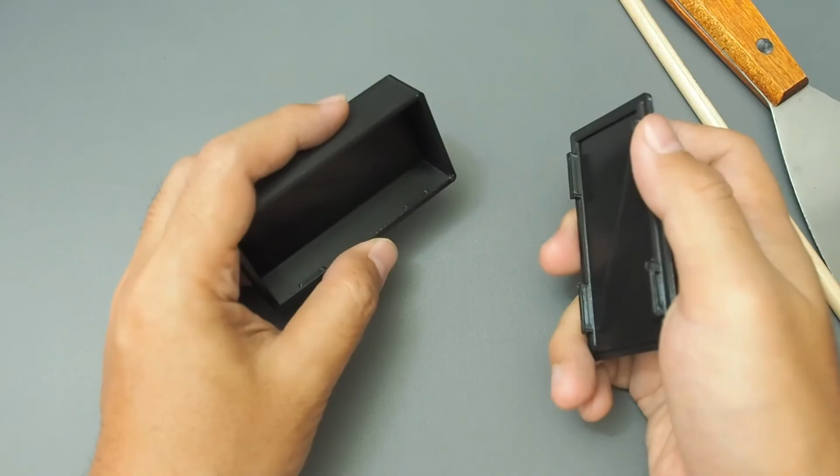Good day everyone, here we have a basic snap fit box or enclosure. It consists of two parts, the base and the cover. Let me zoom in. There are 4 teeth on the wall, and they will bite the grooves that are printed on the cover.

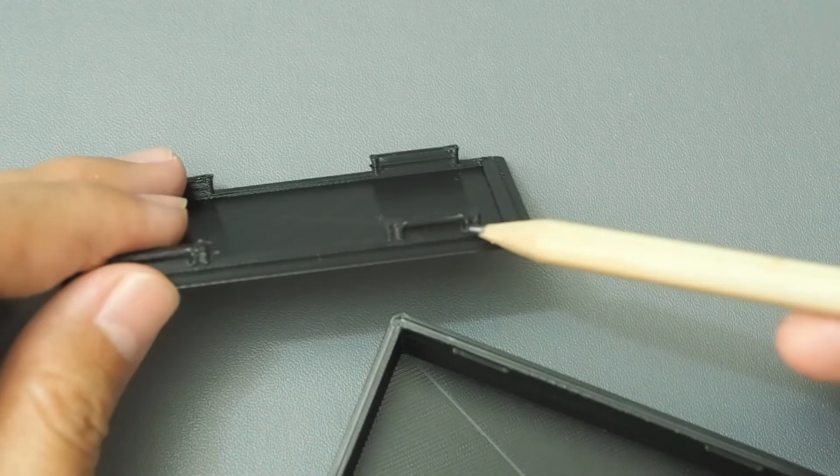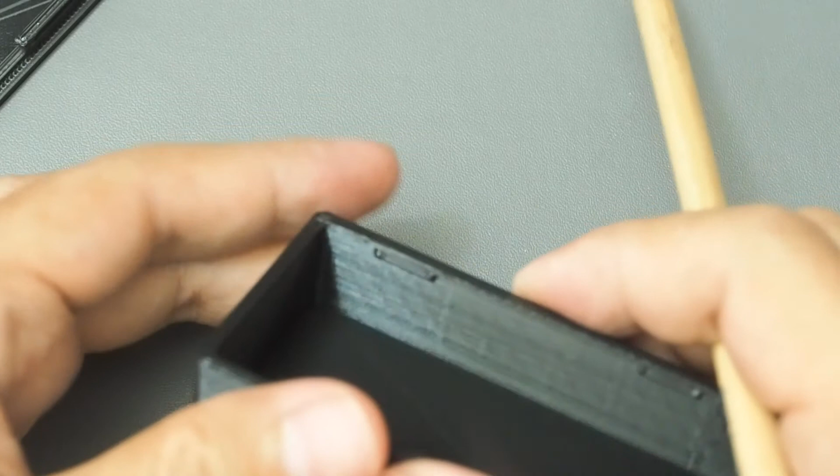There are a few things that I discovered while experimenting with snap fit designs. First, we must consider the flexibility when placing the teeth. For this model, we need to avoid placing them too close to the corners, and in this design, I placed them at a distance of 10 mm.

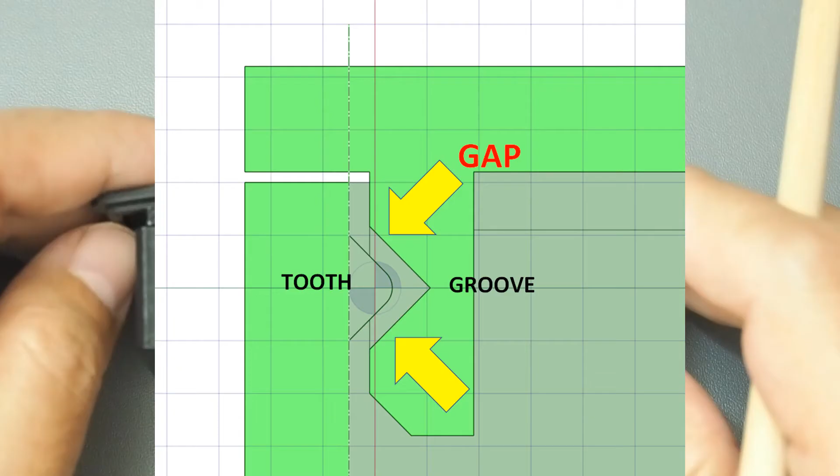Second, we also need to add some gaps or slack. The amount will depend on the accuracy of your printer, but for me, it works fine with a gap of 0.4 mm. For the record, I used a 0.4 mm nozzle with a 0.2 mm layer height.

Third, tighten the snap fit by directly or indirectly moving the tooth away from the contact surface, so it will pull the groove and the cover part. Now let's try to assemble this box. I put the parts together like this and then pushed. As you can see, it goes well.

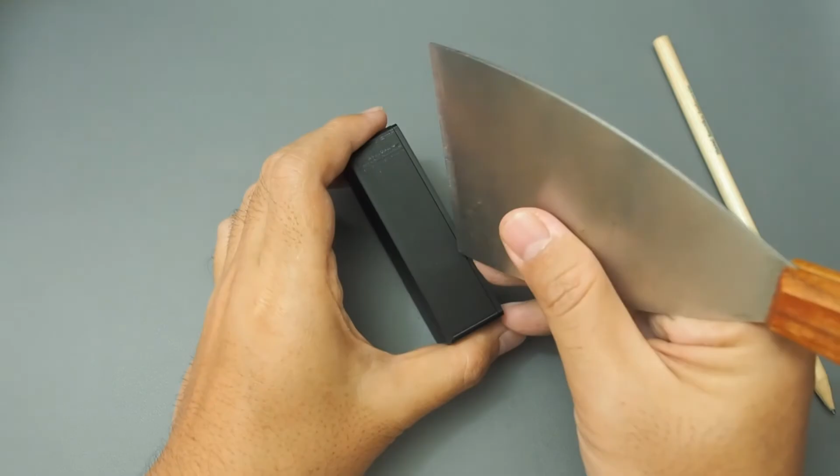And now to separate the parts, I use this scraper. Insert the tip into the small gap, then pry it open. Overall, it holds just fine, so I think this design can be applied to many snap fit enclosures.

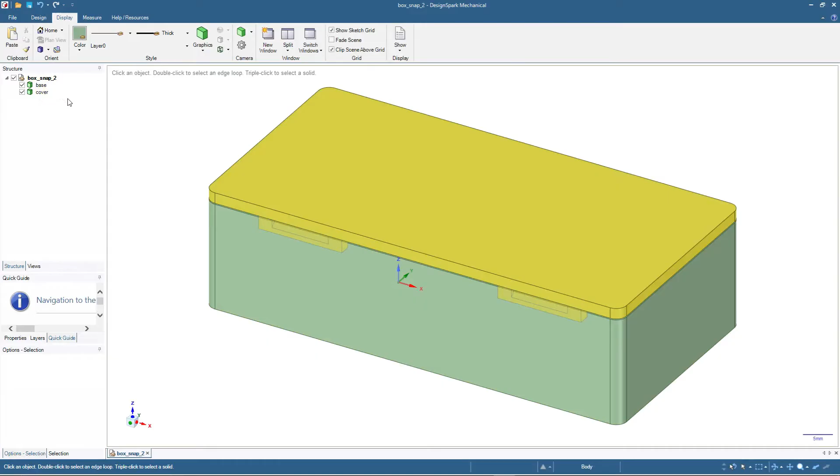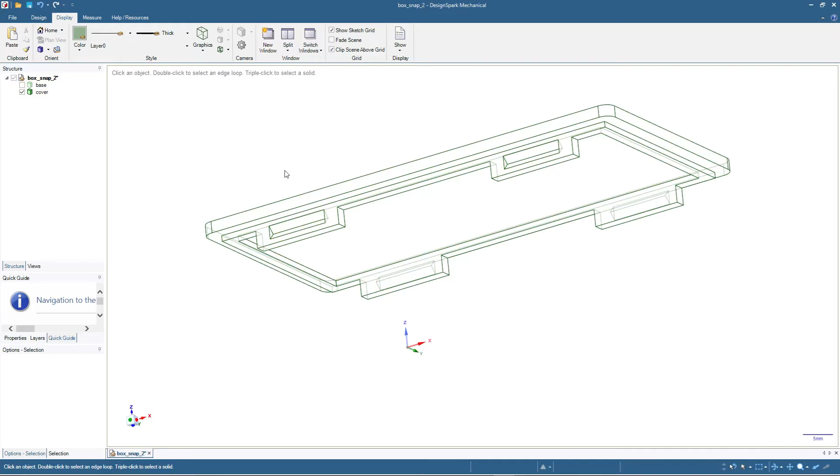This is how the design will look like. It consists of 2 parts, the base and the cover. And now let me change the view, this one, hidden line. So we can see that there are 4 teeth here, which is on the base part, like this, okay? And then there are also 4 grooves at the cover, which the teeth will bite into.

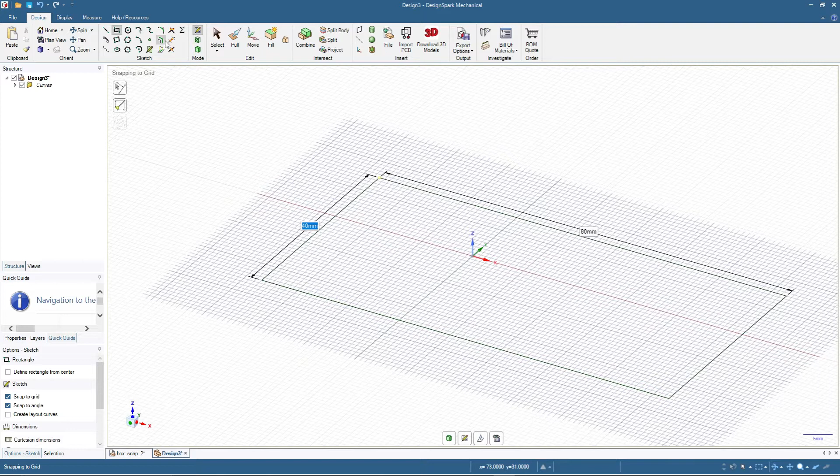So now we will design from scratch, and as usual, file, new, design. Okay, for this one, let's start with a rectangle with size 80 by 40 millimeters. So it's 80 by 40, yes. And then let me click this one, the offset curve, and we will add thickness. So I just double click this line, and then we will add 2 millimeters.

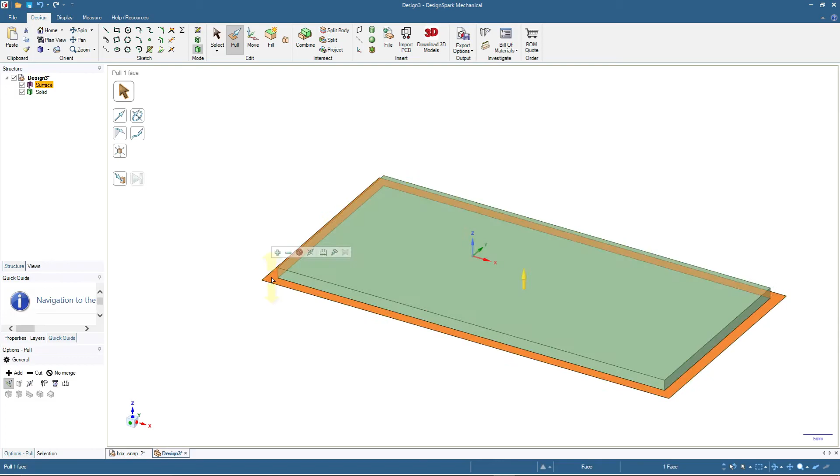Okay, and then I will click this one, pull, and I will pull this one as the base, 2 millimeters thick. Okay, and then for these walls, I will pull or extrude by, let's say, 20 millimeters. Okay, now we have this base shape. We will add the cover or the top part.

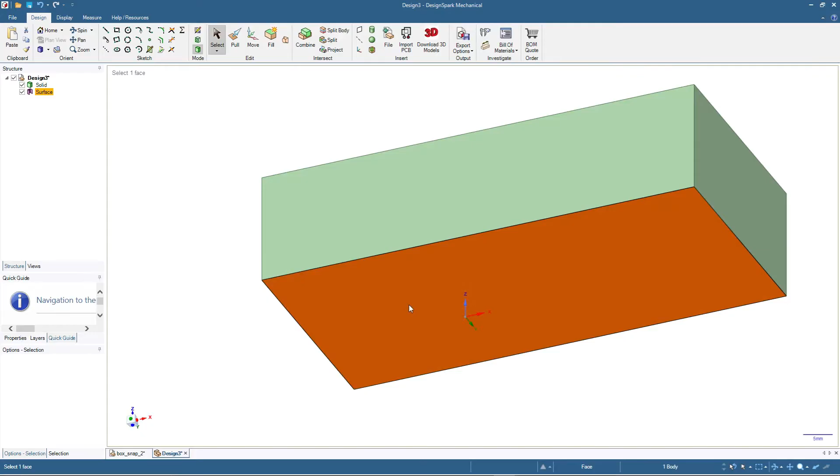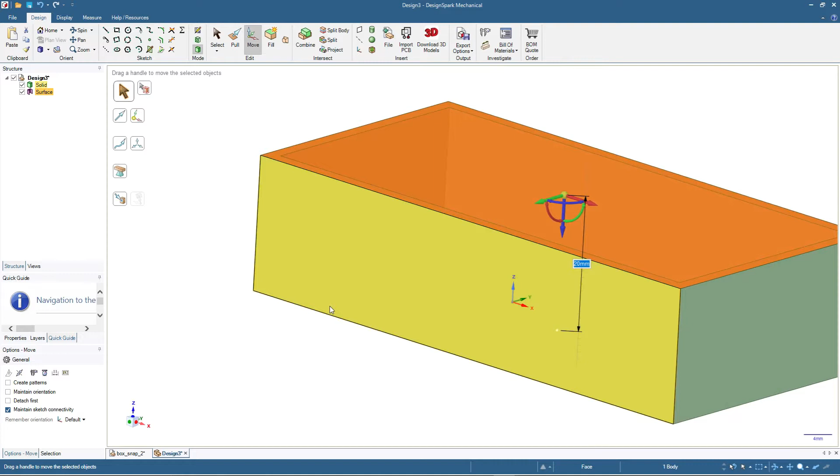I will copy this one, click here, and then press Ctrl C on the keyboard, and then press Ctrl V. So now we have a copy of the surface, and click this one, move, and we will move this one up by 20 millimeters. So we have that copy surface here, but we will add some more gap here to make allowance with the base part. So I will type in again 20.2, meaning we have 0.2 millimeters allowance, like this.

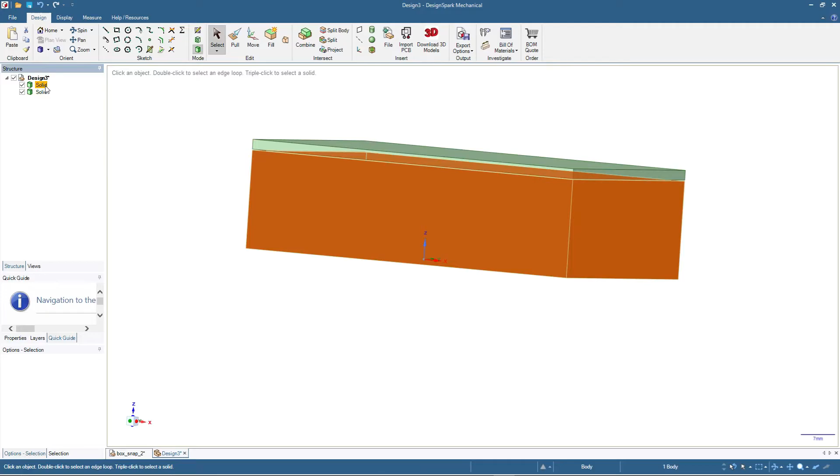Okay, now we will extrude the cover part from the surface, and then click this one, pull, and extrude by 2 millimeters. Okay, now we have this base and cover or cap. So let me rename the parts, base and cover. Okay, and then we will add some features for the snap fit mechanism.

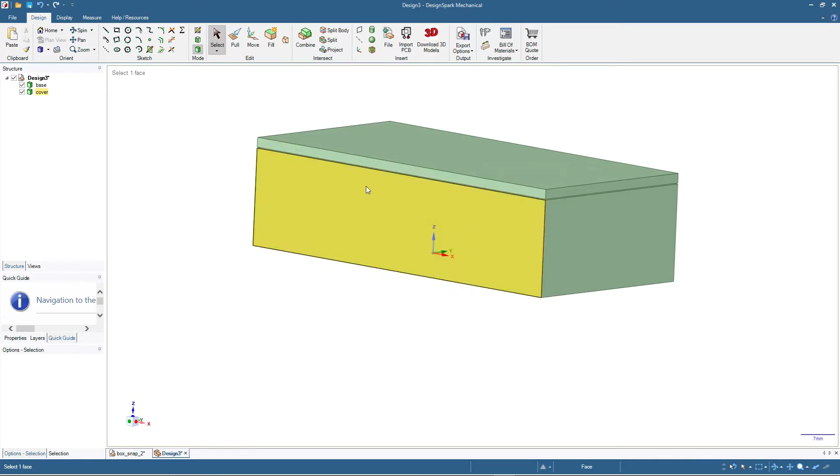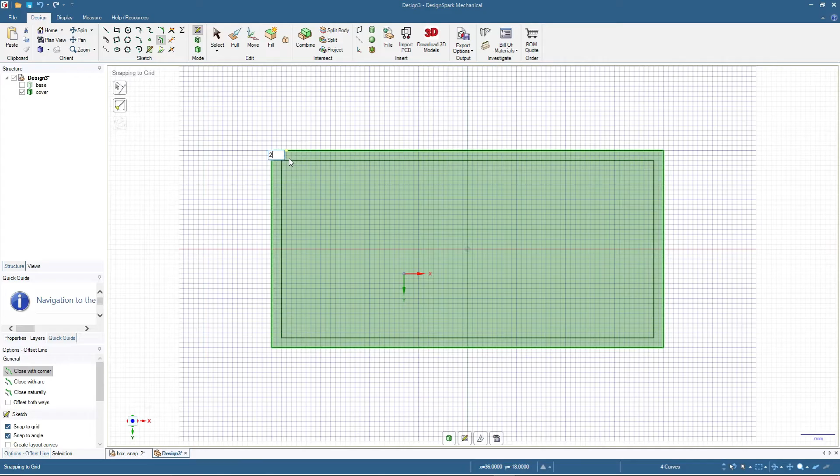But first I will add some walls to the cover so that it will fit in nicely, not running everywhere. So let me hide the base. Now we have the cover, and I'm clicking at the inner side, and then I press K on my keyboard and V. So we have this view, and then I will double click this outer line, and then click this one, offset curve, and we will add not 2 millimeters but 2 millimeters with gap 0.4. So this one will be 2.4 millimeters.

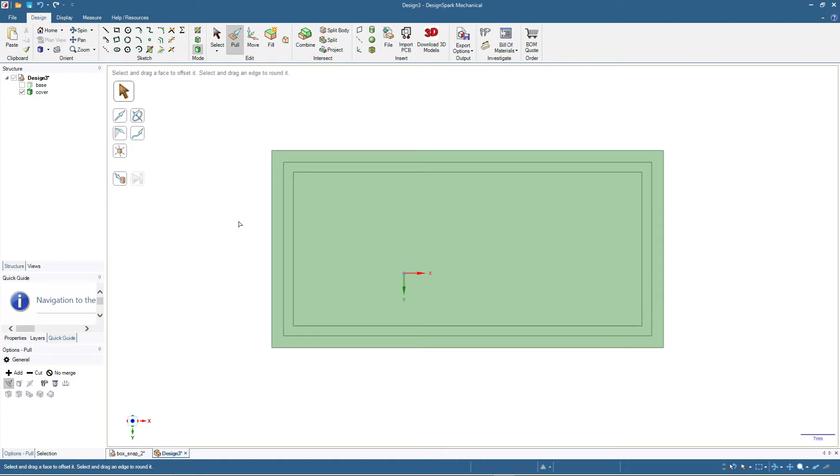And then after that, I will double click this one, the inner rectangle, and add 2 millimeters. This one will be the inner wall. Okay, and then I will click this one, pull, and then we will rotate a little so it will look something like this, and click this one, and we will add, let's say, 5 millimeters.

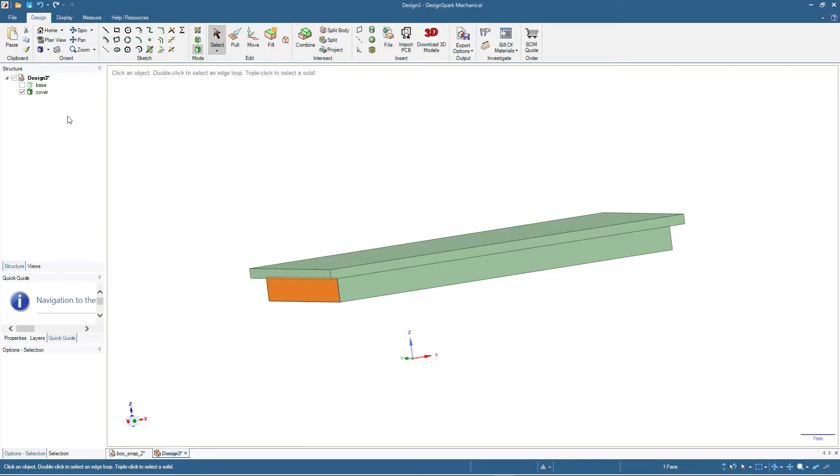Okay, so now if we print or we take a look at these two parts, it's going to fit nicely. It's just not snap fit yet. So let me press K and show you how it looks. Something like this. Okay, now we will add the snap fit feature, which first we will add the teeth, or 4 teeth in this case.

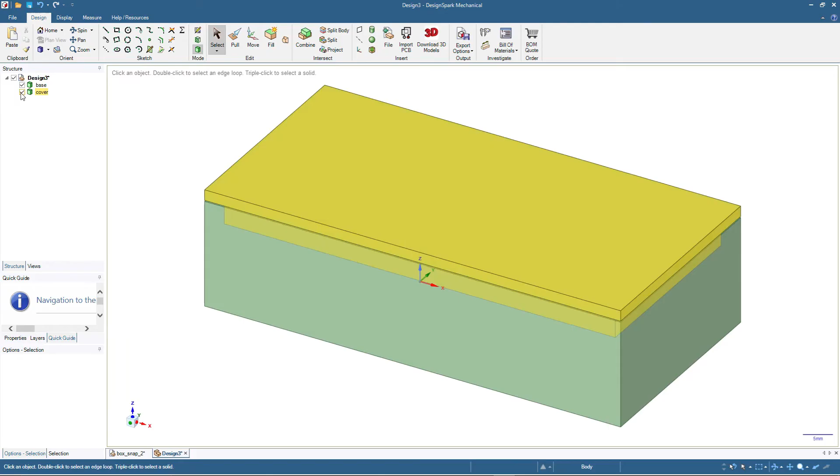I will hide the cover, and then we will add some teeth at this wall. So I'm pressing V on my keyboard and K, so we have this view, and we will add a rectangle here. But okay, sorry, first I will click this one, line, to make some distance from this corner. So I'm going to move by 10 millimeters.

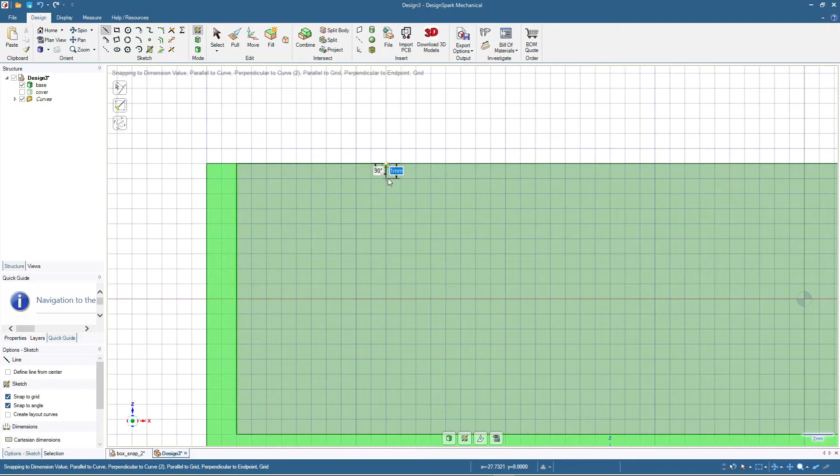Okay, so meaning 10 millimeters is here, and then I will click this one, rectangle, and I'm going to use the line before that as a reference, and then move a bit here and make a rectangle with 10 millimeters wide and 2 millimeters high, like this.

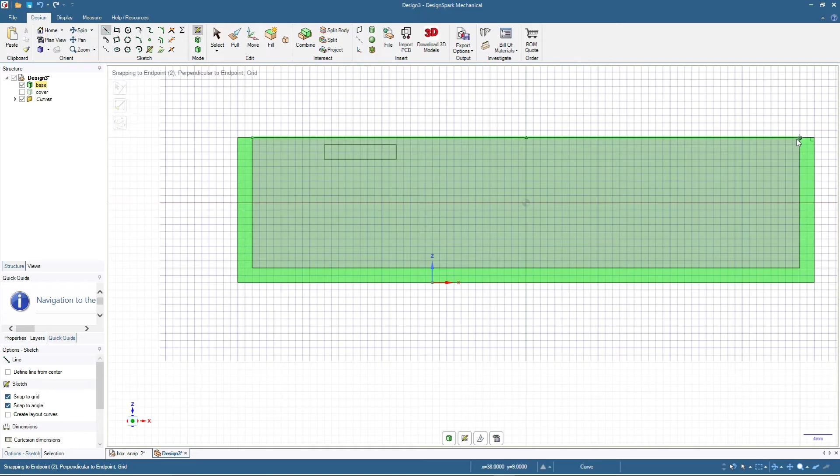And also we are going to do the same from this side. So I'm going to make another line as reference. Okay, so here, and then a rectangle just below that, 10 by 2. Okay, so now we have these two rectangles, and we will change this one to become tooth

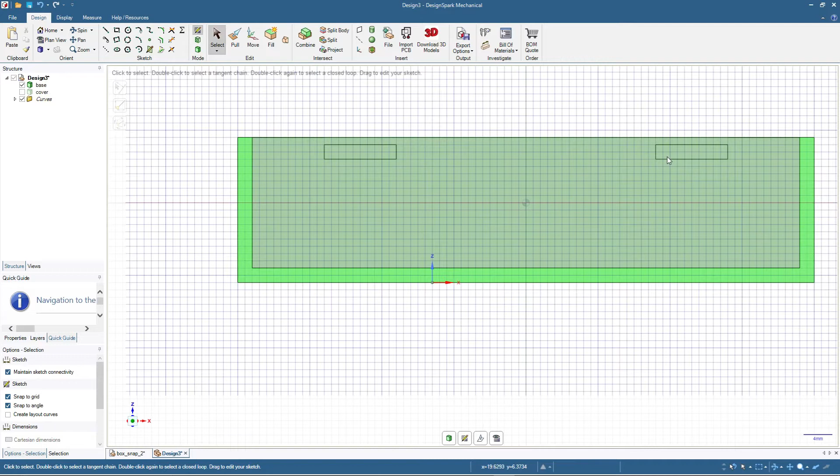or teeth. And to do that, we will click this one, 3D mode. Okay, and then rotate a little, and we will pull this surface. But before we do that, let me copy these two rectangles to the other wall so we don't have to make a new one. And to do that, I will press Ctrl C on my keyboard.

So I press Ctrl and then select all of them, click one by one, and then press Ctrl C and then press Ctrl V. So now we have these two copies at the left side of the structure. You can see two surfaces there, and then click this one, move, and then click this arrow.

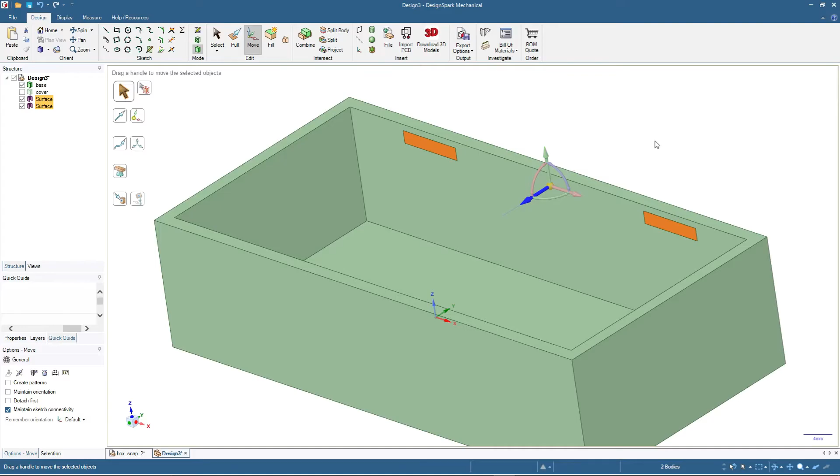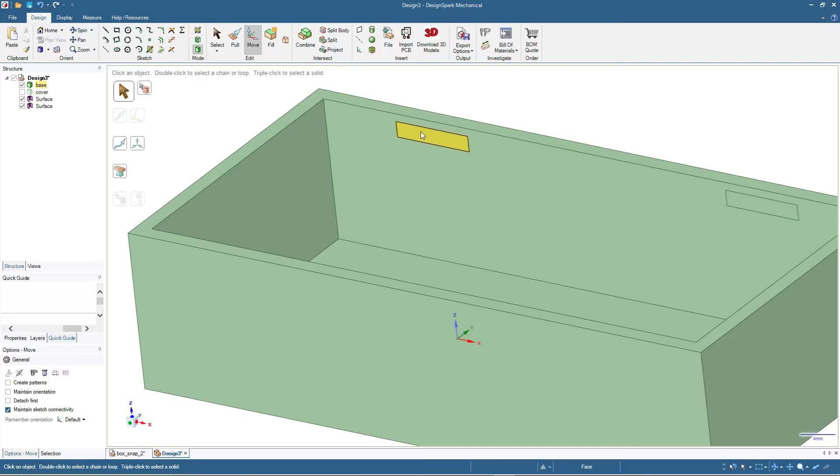Okay, and then I'm going to press this one, up to, or you can also press U on the keyboard and click here. So we have the copy of the surface at the other wall at the same or similar location. And now we are going to make the tooth. Let's start one of it first. Click here and then click pull, and then I'm going to pull by 1 millimeter.

Okay, but as you can see, the sides are perpendicular. It's impossible to print easily, and also it's impossible to do as a snap fit. It will not fit nicely, it will get stuck. So we are going to click here and then use this one, the chamfer, and then we will do a 1 millimeter chamfer. So meaning we extrude 1 millimeter and add 1 millimeter chamfer.

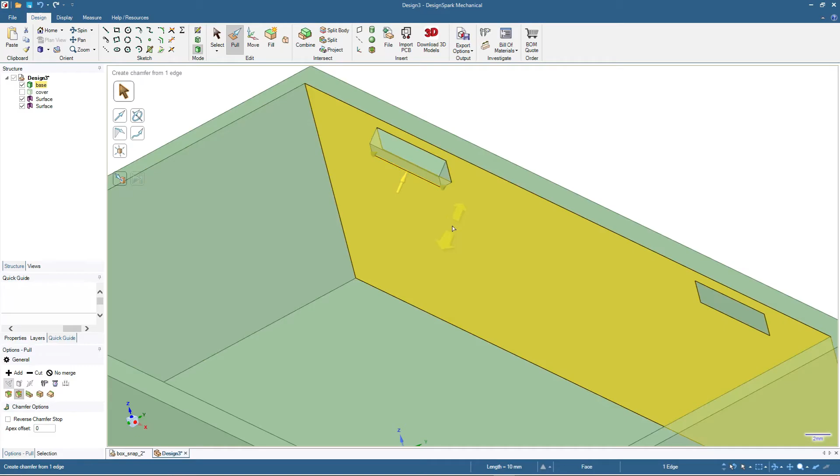We'll do the same for the other side. Okay. Anyway, you can also use another method which is also easy to do. We can click here at one of these triangles, and then press Ctrl C, Ctrl V, and then move to this side. Press U or click this one, up to, and I'm clicking this line.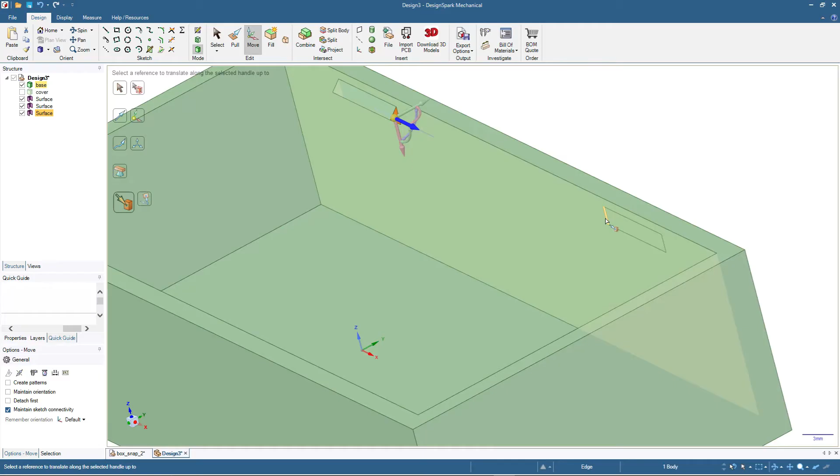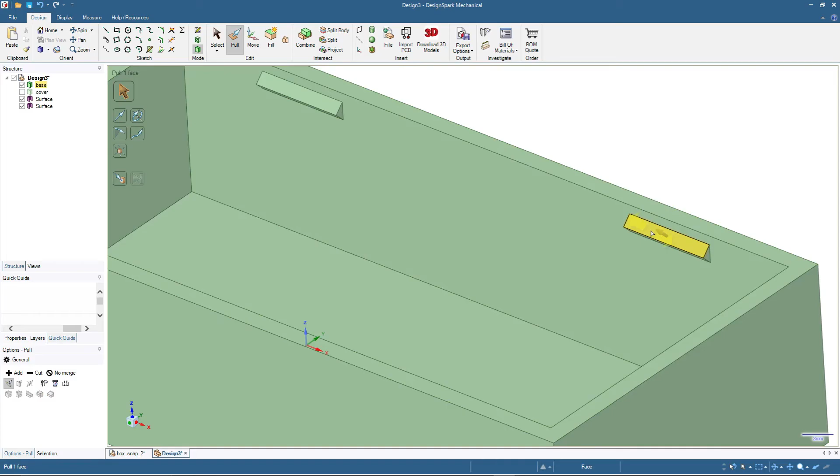Okay, so we have the copy of this triangle, and then pull, press U again, or this one, up to this one. So we have the same teeth or tooth design at this position. Okay, now we will make the same thing for the other wall. You can use whichever method is easier, but for this, let me just do the first method.

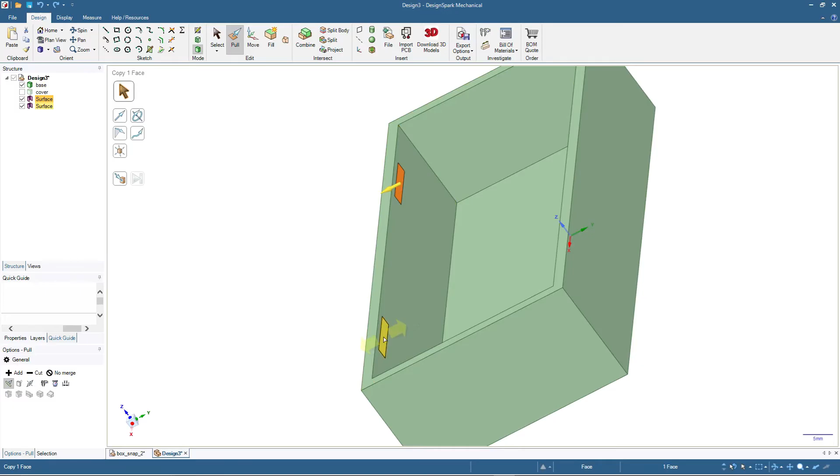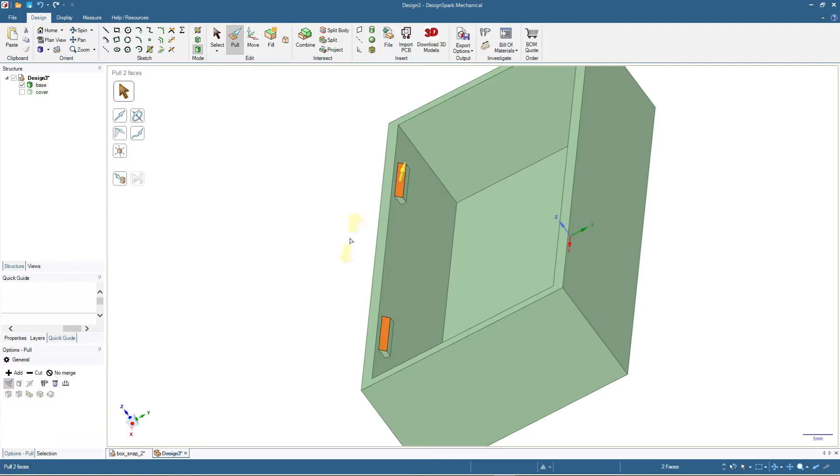And to do that, I press Ctrl on my keyboard and click one by one, and then extrude by 1 millimeter. And then again, I click at another area, so we will escape from the selection, and then press Ctrl again, and then click these two lines. Okay, and then use this one, chamfer, and then pull and type in 1 millimeter, and also the same thing for the other side, chamfer 1 millimeter.

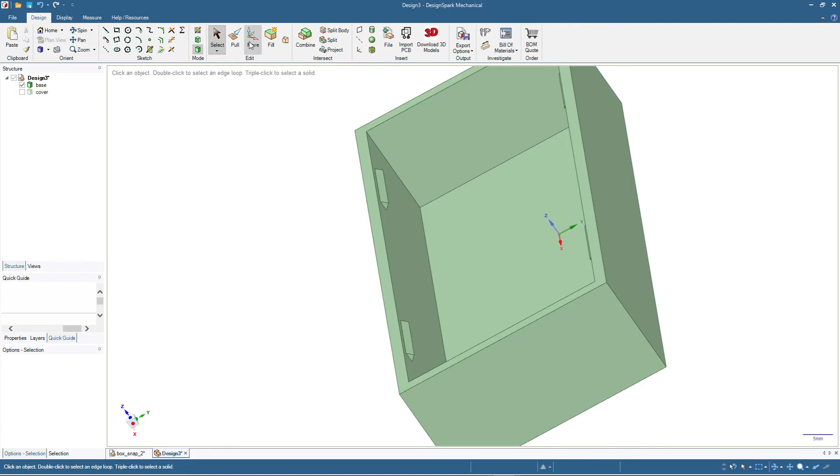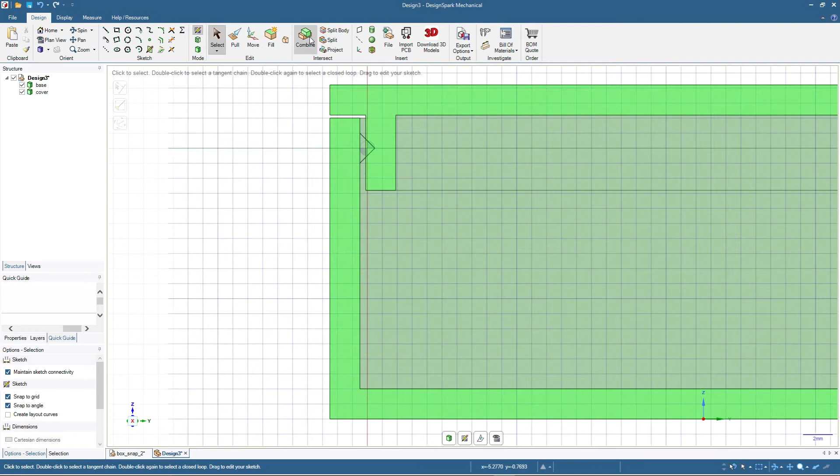Okay, now we have the 4 teeth ready for the snap fit, and now we will need to make the groove where the teeth will bite in on the cover. So I'm clicking here and then press K and then V, and I'm showing the cover. So now we have these teeth which are ready to bite at the cover, but still we don't have any groove here. And to add the groove, we are going to use a simple method using this one, the combine tool. And to do that, I'm clicking this one, combine.

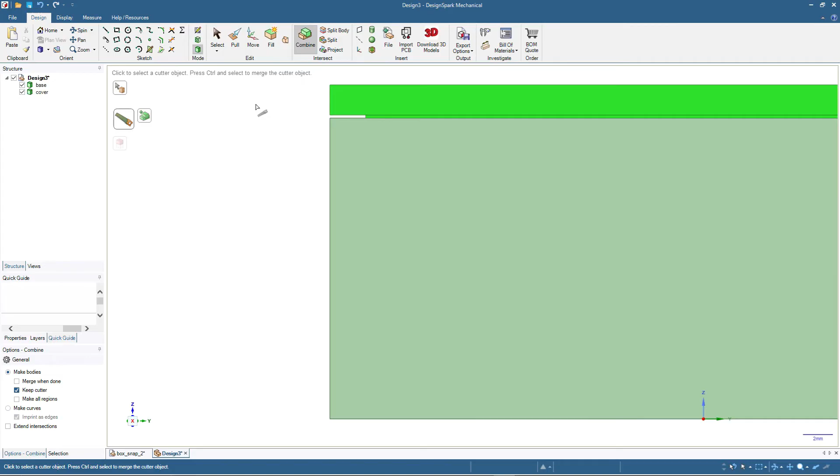Okay, and then I'm going to select the object that we will cut from. So in this scenario, we are clicking the cover, and then as you can see, there's a handsaw icon, and we will use this handsaw icon to click on the cutting solid. So in this case, the base, which has the teeth that we will use to cut a groove from the top part. Okay, done. So now let me show you. So I just click select, and I will show you how it will look.

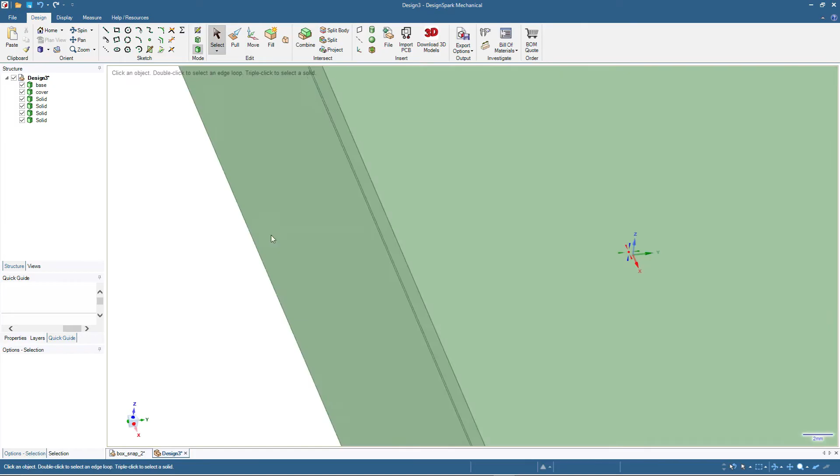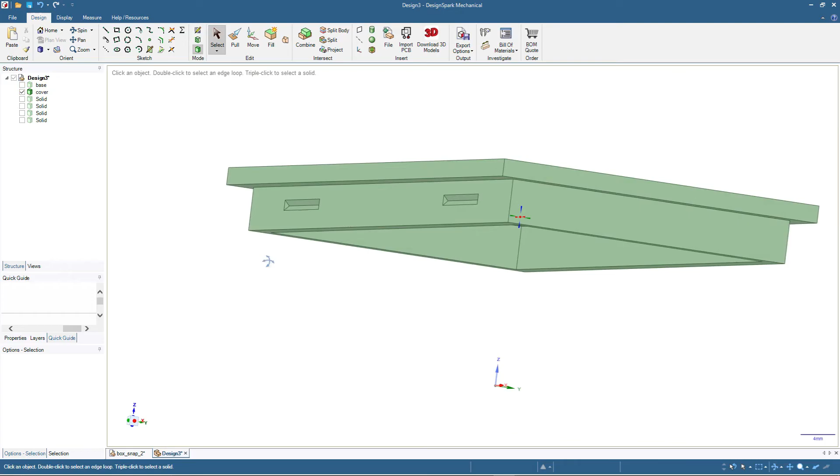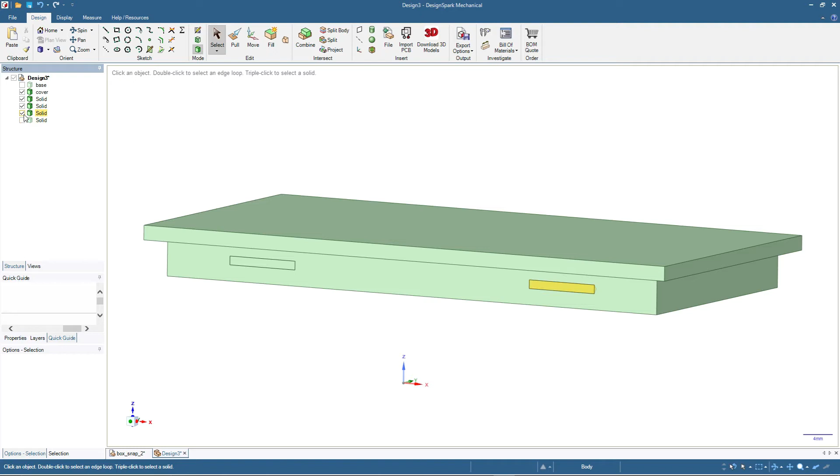Okay, the base part will stay the same. So if I hide the other solid, as you can see, the base is the same, but now we will hide the base and show you the cover. So this is how the cover will look. There's some groove here, also at the other side, and this is the remaining cut solid. So we can just delete or ignore this remaining solid which was already cut out from the cover, but for this case I'm going to hide it first.

Okay, and now if we take a look at the cross-sectional view, it will be like this. So I press X, V, and then this is the base. So as you can see, this is the tooth and this is the groove, but it still has no allowance or gap, and we will add 0.4. There are several methods, but we are going to use the simple one.

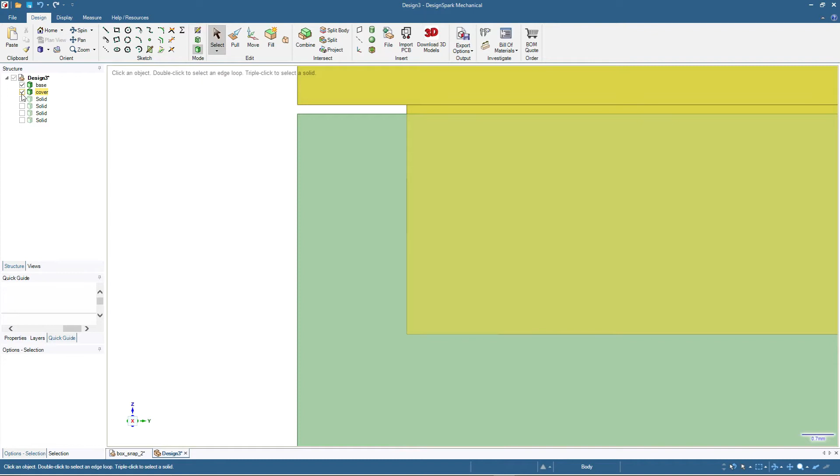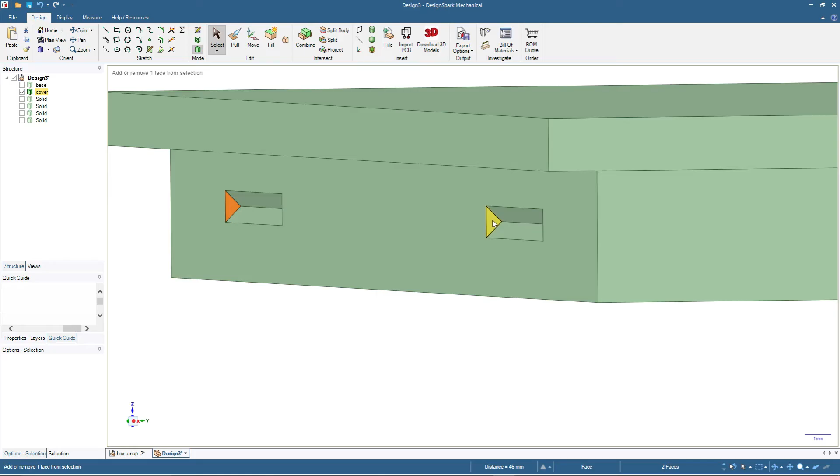So I'm going to click this one, 3D mode, and hide the base, because we are going to enlarge the groove to make allowance for the contact or snap fit. So I'm clicking this one, and then you can press Ctrl first and then click the surfaces that you want to move, and then move to the side. Wait a moment. Move to the side by 0.4.

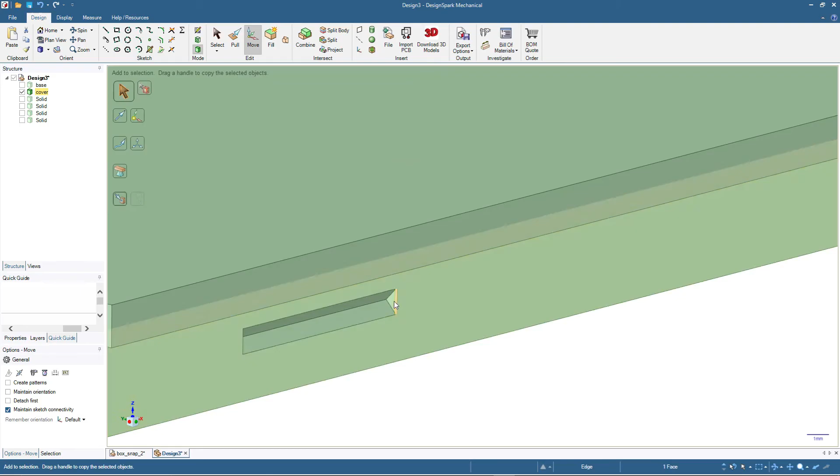Also the other side, same thing, 0.4. Also for the sides of the groove, this one also by 0.4, and click somewhere else and then press Ctrl and then click on these two surfaces and move by 0.4.

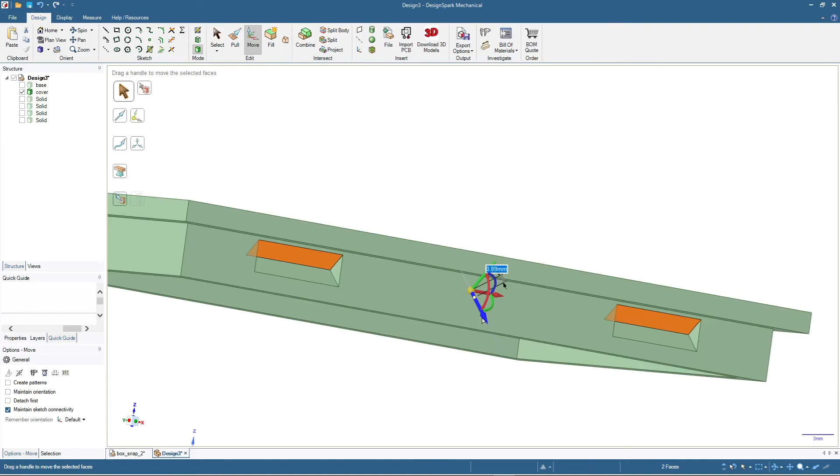Okay, done. Now this side is already done, and we need to do the same thing for the other side. So let me do the same thing. Wait a moment.

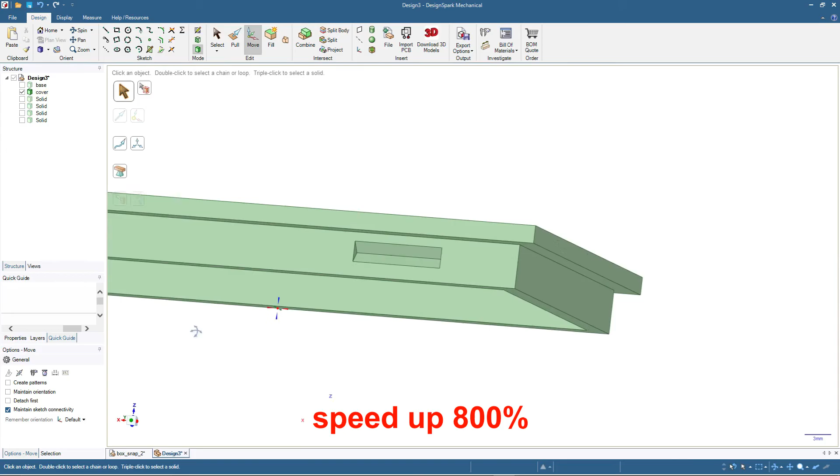So now we have this groove, which is already enlarged by 0.4 at each side. And now let's take a look at the cross-sectional view. So wait, let me select this surface. Okay, V, and then okay. So we have this shape now. This is the base with the teeth or tooth, and this is the top with this groove.

But we will need to pull tighter, meaning that we need to move the teeth in this direction away from the contact surface, or we can also move this groove away from the connection or the snap fit, meaning toward the contact surface this way, or we can also add some thickness at this edge, whichever method is possible. But for this one, I will just move this teeth away in this direction by 0.2.

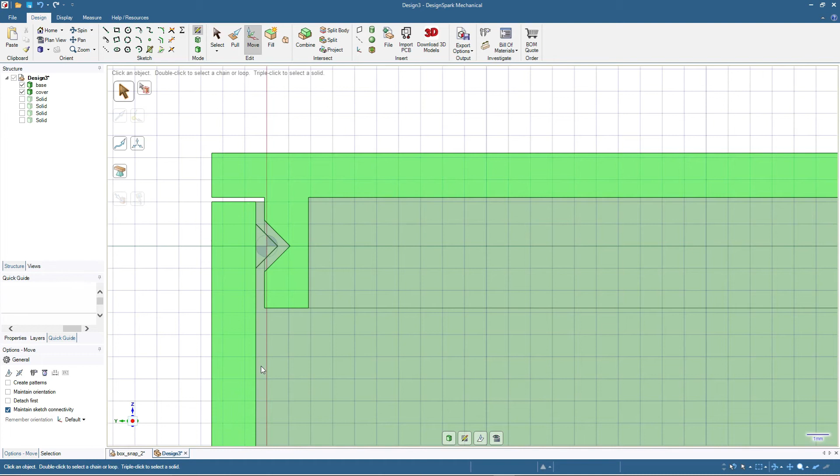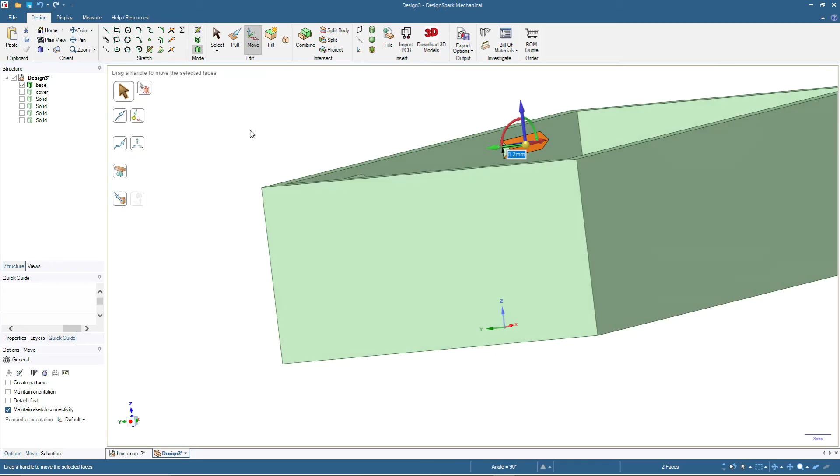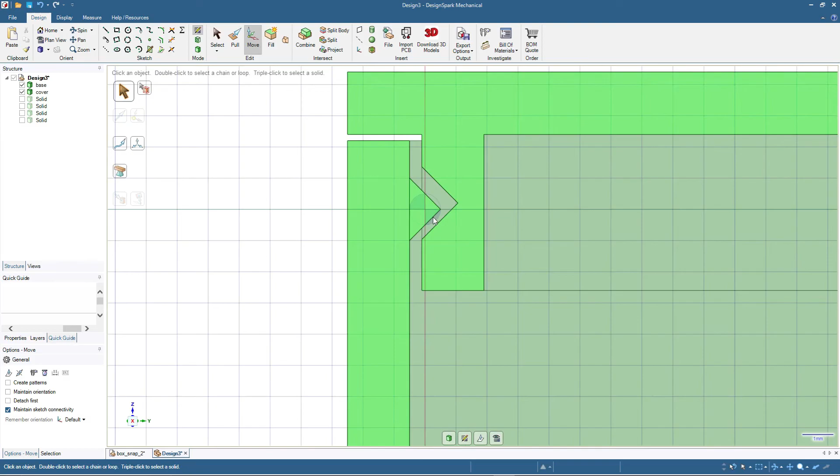So wait a moment, let me hide the cover and we will move the teeth. So 1, 2, and for this one we'll move by 0.2 and do the same thing for the others. Okay, so this is how it looks. The teeth will bite onto the groove and pull it in this direction, meaning that the allowance that we give will have more space at this area and less at this area, meaning that it will make some pull to the mechanism or to the snap fit.

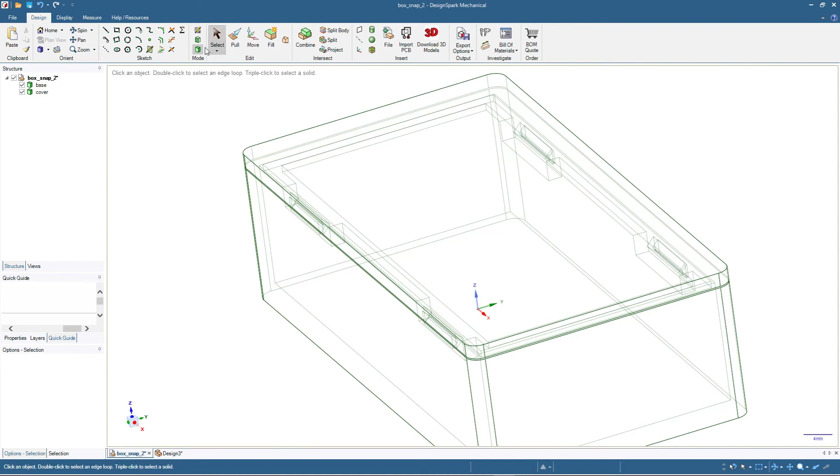Let's compare to the first one. So let me change the view, display, shade it. Yes, a similar design, but okay, let's also add some features like this rounded corner for the tooth to make it easier to slide in the cover, and also we'll add some more curve here or maybe chamfer here.

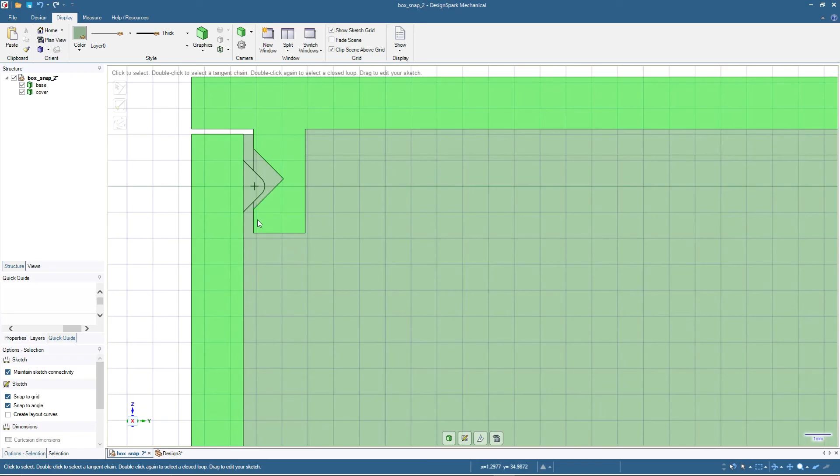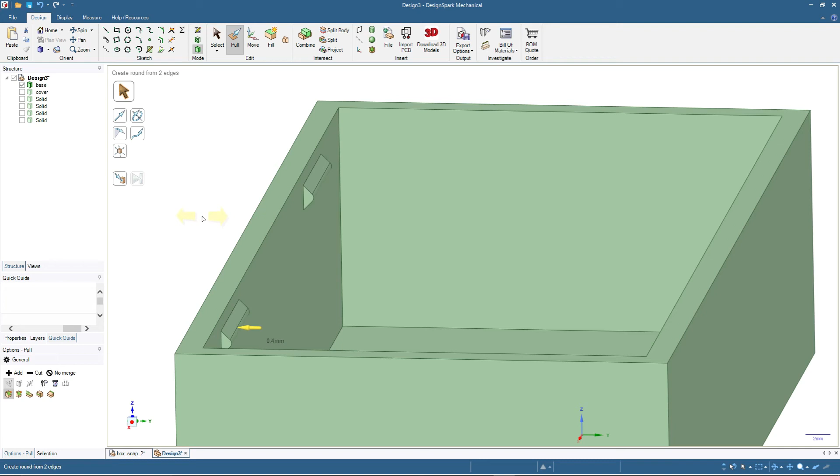So let me move to the design. Okay, let me hide the cover first and press okay, design 3D mode. We will add some rounded edge or corner to this one, so pull, we will round by, let's say 0.4. Also for this side 0.4. Done.

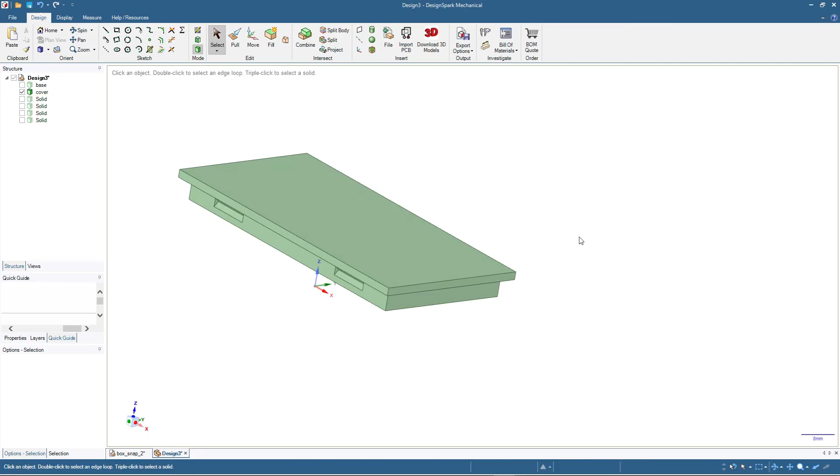And then we will also make it easier for the cover to slide in, so I'm hiding the base and showing the cover, and we will click here and also here, and then click this one, pull, chamfer, and we'll add, let's say 0.8. Okay.

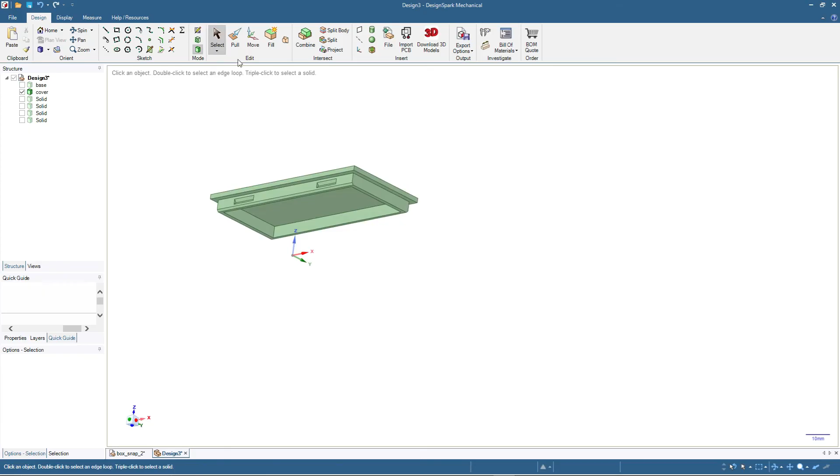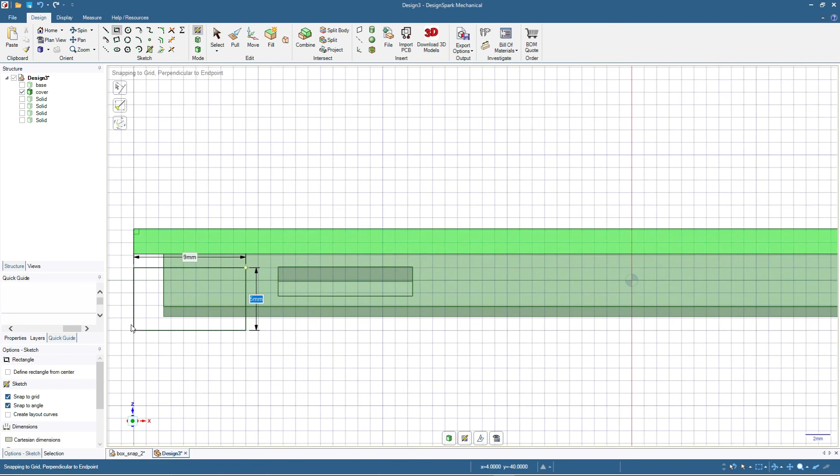Now we will add some more finishing touches. So let me click here and then press K and V. So we have this view. We will cut away some part that's not necessary for the cover. So in this case, I'm going to make some rectangles to cut away the part that's not needed. I'm clicking this one, rectangle, and then I'm going to make a rectangle here and also here and here.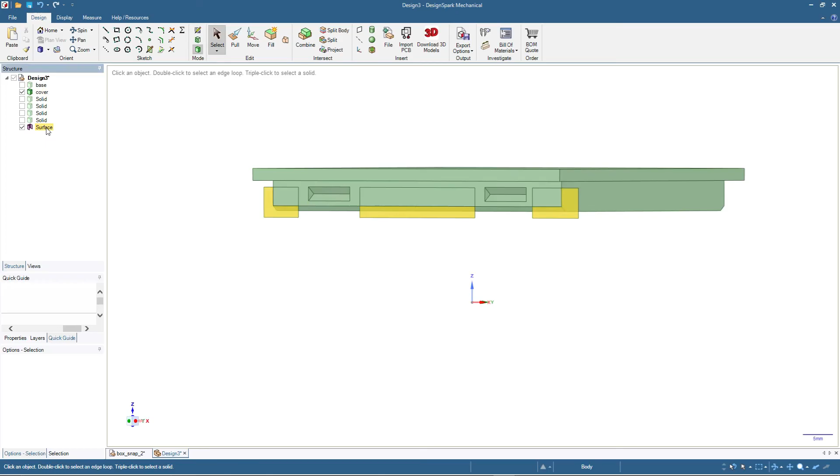Okay, and then click this one, 3D mode, and I'm going to select those surfaces, so I can just click here, and then okay, I will also need to select this one, so I'm pressing Ctrl on my keyboard and then click this one, and this one, then click this one, pull and cut, and then cut like this. So we have this shape, meaning that the groove only needs this amount of plastic. So we cut away some part of this design.

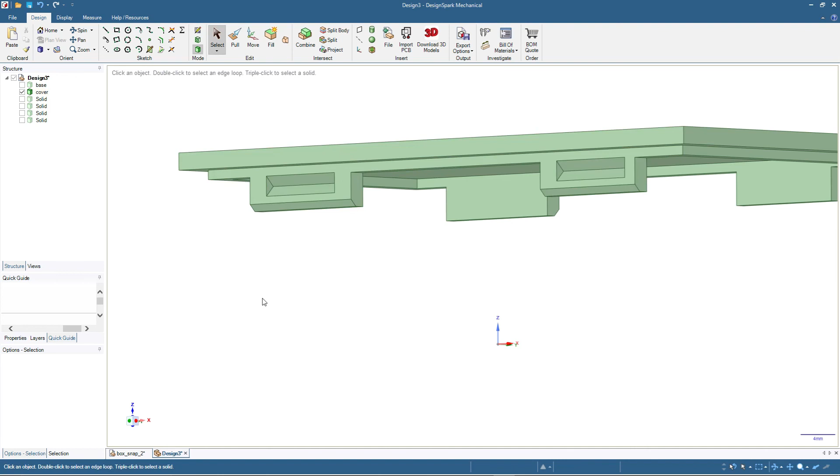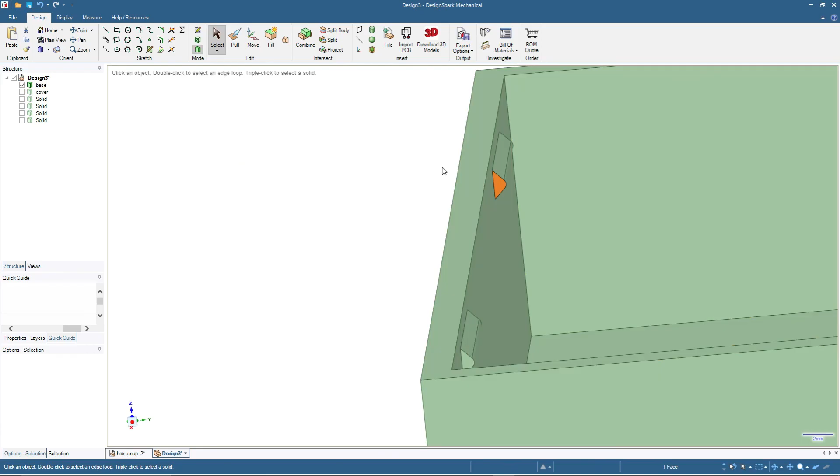We can save some material, and it will also add a small amount of flexibility to this groove part, meaning it might give just a slight possibility for it to bend inward and make it easier for us to assemble with the cover. So wait a moment, let me show you how it looks in the cross-sectional view. So I'm clicking the surface and then press K, V, and like this.

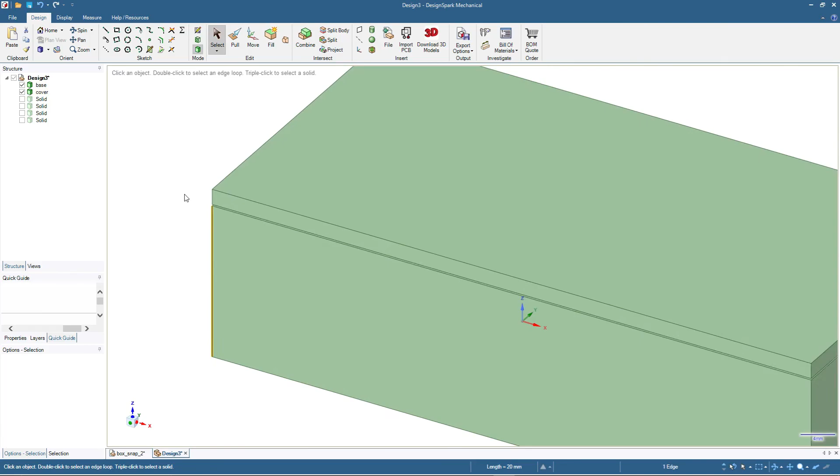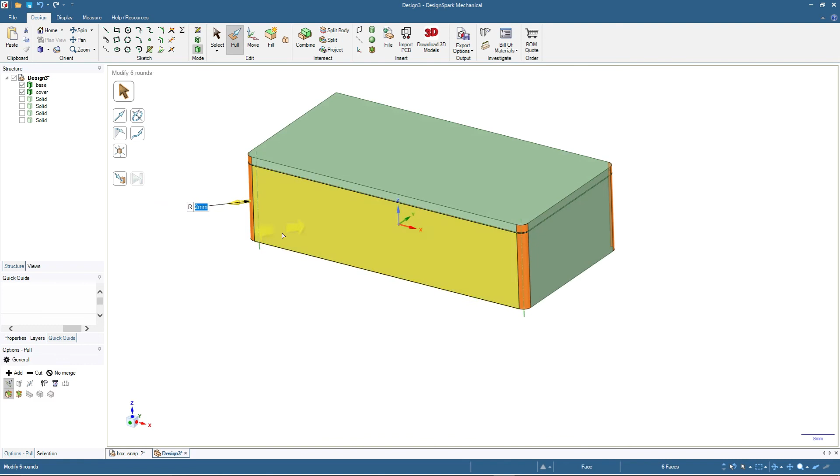So we have this design now, and I'm sure you can design a snap fit case or snap fit enclosure by yourself. Anyway, you might want to add some rounded corners for this kind of design. So let me add to mine. I just press Ctrl and click all these corners, and then click this one, pull, and move away by 2 millimeters. And now for the remaining corner, wait a moment. This one, press Ctrl, and this one, and we'll round by 2 millimeters.

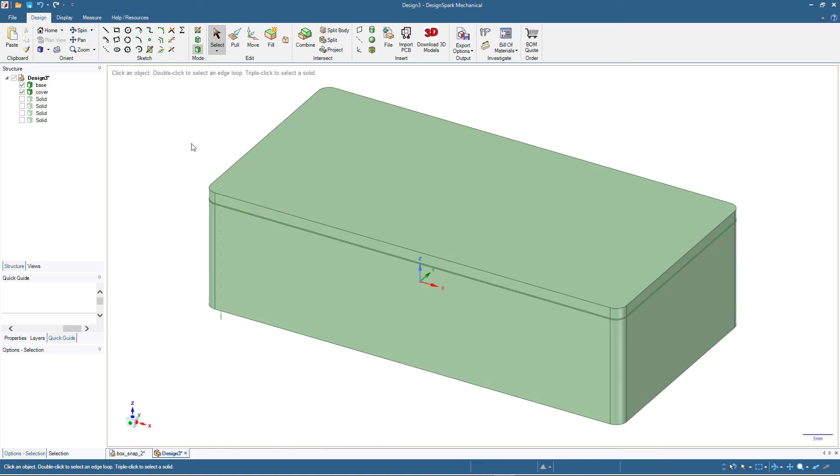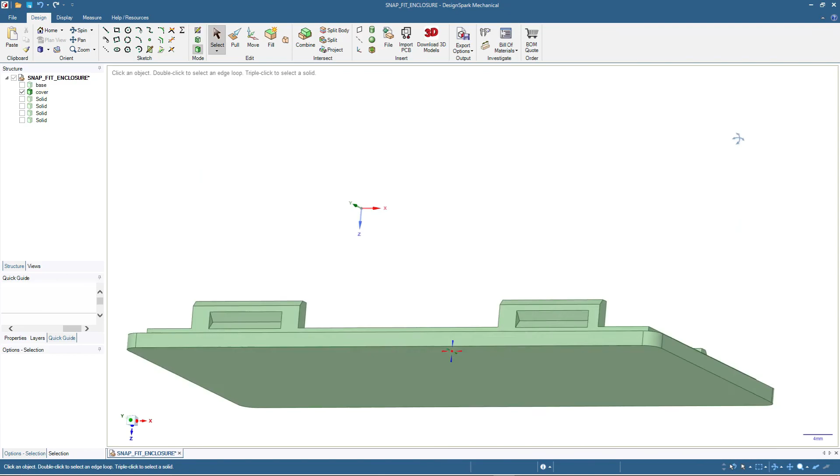By the way, I forgot to add that for the cover or the top part, you will need to flip it upside down for the 3D printing process, especially if you're using an FDM printer. And you don't need to add any support for this design. So it will be like this. Okay, that's all for the snap fit enclosure. I'm sure you can design with your own specification, dimensions, and so on. And hopefully this tutorial will be helpful for your next project.